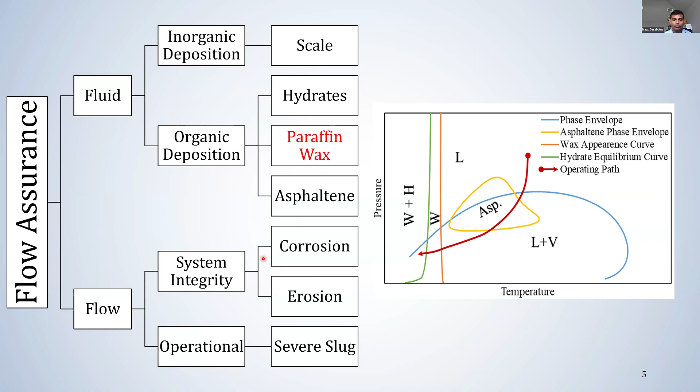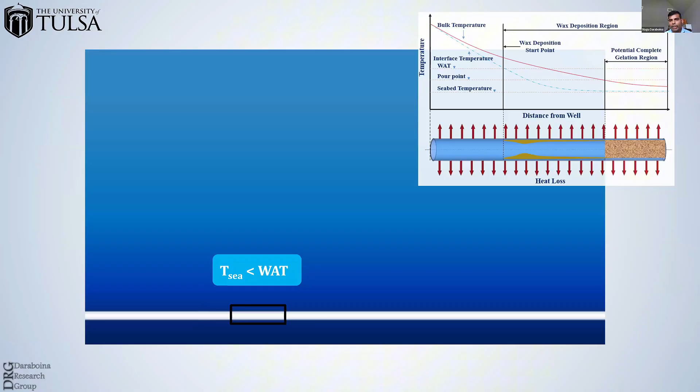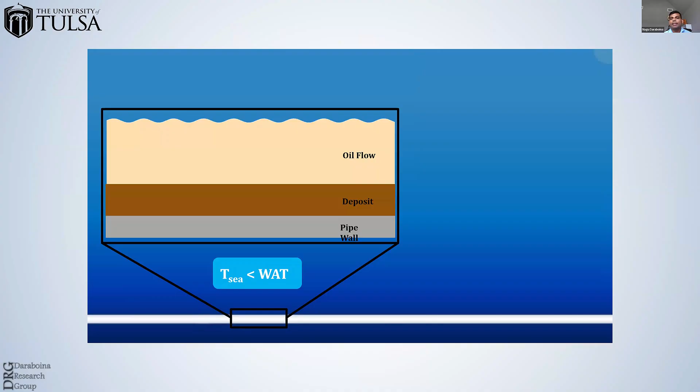But today, particularly, I want to focus on wax deposition. In subsea conditions, the hydrocarbons are exposed to a very cold environment. As the produced fluid reaches and goes below the wax appearance temperature, what we call WAT, the wax will start to precipitate out and deposit on the pipe walls over time. This deposition can inhibit, even completely restrict, the flow, resulting in decreased production, increased costs, and even complete facility shutdowns in some cases.

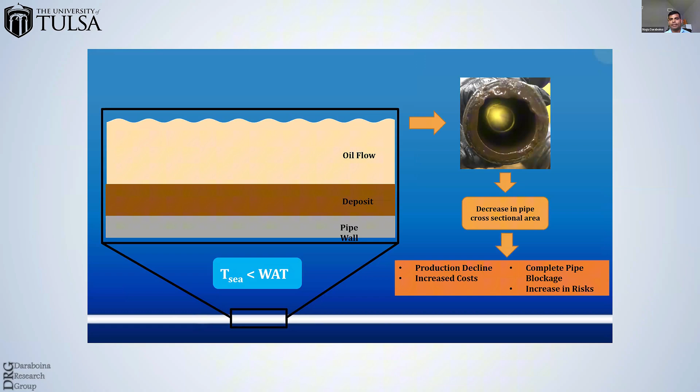So now I would like to explain how the University of Tulsa and the oil and gas industry work together to solve this flow assurance issue of wax deposition. It starts with companies generally evaluating their oil assets, looking at how much oil they have, its quality, and how we can analyze to determine if it's worth investing in a particular project.

Then we begin running small-scale experiments in labs using tools like gas chromatography or a rheometer, small scale, to understand how it behaves under different conditions. This step is what we call benchmarking. If the results look good, we move on to larger experiments using flow loops that better represent actual pipeline systems. From this, we develop detailed models to predict issues like wax buildup and flow blockages. These models are then used in flow assurance software, which helps simulate what would happen in the field.

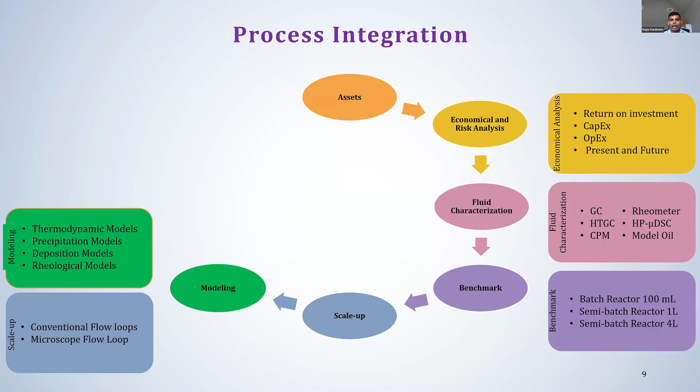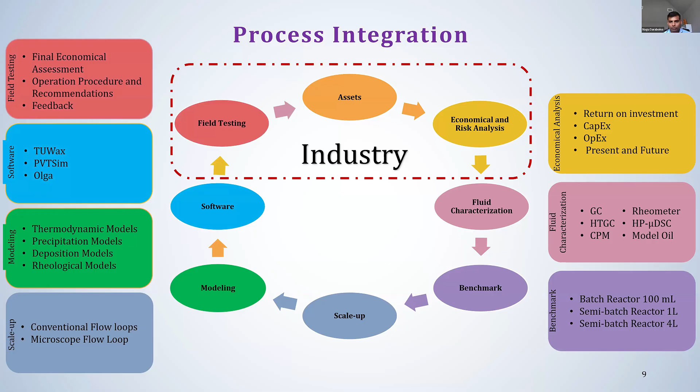After this, industry moves into field testing, where they apply possible solutions to real world conditions and gather feedback. So both sides, industry and TU, exchange and share information constantly.

The industry provides real data and feedback, while we refine their models and improve the tools. One of the key deliverables industry expects from us is a practical simulation tool that can be used directly in the field.

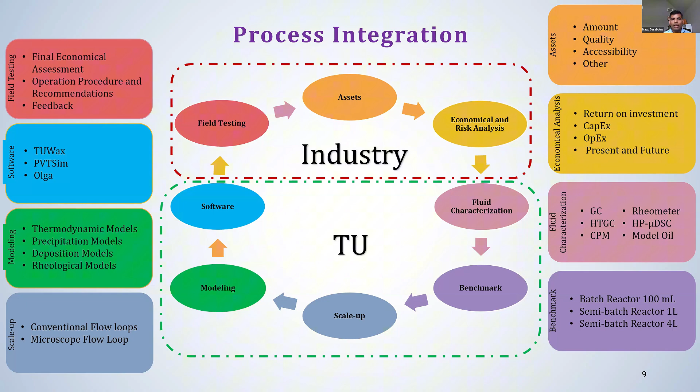These modules interact iteratively to reflect real-time behavior. After updating the conditions at each time step, the loop continues until the final simulation time is reached. This modular and iterative approach allows for flexible, accurate, and scalable modeling of field scale systems.

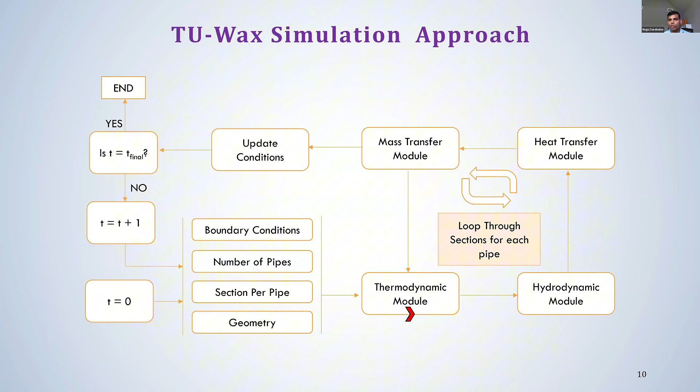Today I would like to explain how the thermodynamic module really plays a role in the wax deposition simulator. To accurately predict wax behavior in the oil and gas production system, it allows us to determine the wax appearance temperature.

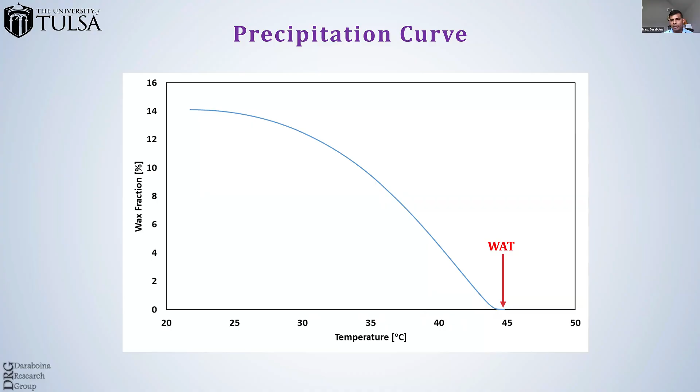Along with the temperature, if you know the pipeline temperature, we can also predict how much wax is coming out, and its composition. So these two are very important thermodynamic properties we want before we even go to the wax deposition modeling.

The most widely accepted wax deposition model since 2000 is the film mass transfer theory. This model assumes all the soluble wax molecules reach the mass transfer boundary layer and start precipitating out, then contribute to the deposit.

Here, thermodynamics provides very important information for the model called boundary conditions, which is where the wax deposition actually starts.

The temperature is supposed to be below WAT, otherwise the wax deposition doesn't start. Once it starts, the precipitation curve is what dictates how much is actually precipitating out and depositing.

However, how do we verify this model's predictions before the field trials? We need experimental data. But wax behavior is highly sensitive to temperature, flow conditions, and composition, so reproducing these conditions in the lab with accuracy and consistency is difficult.

Measurements like wax thickness and deposition rate are also very hard to capture without disturbing the system, and these tests often take a very long time.

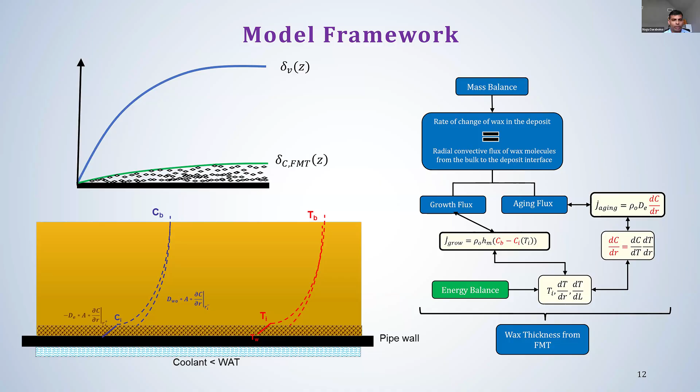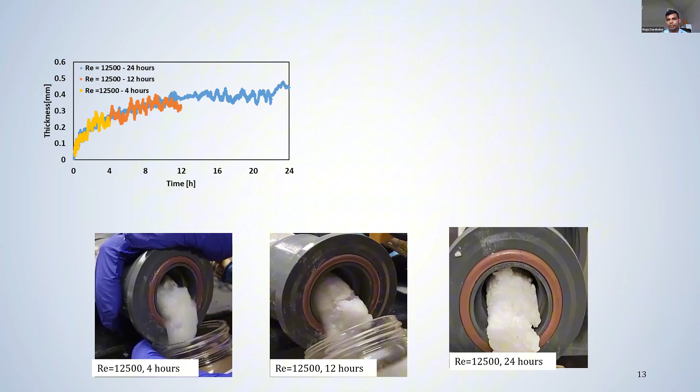As wax accumulates on the pipe wall, the effective internal diameter decreases, causing an increase in pressure drop across the test section. By comparing the measured pressure drop during experiments with the baseline, in this case clean pipe, we can back-calculate wax layer thickness.

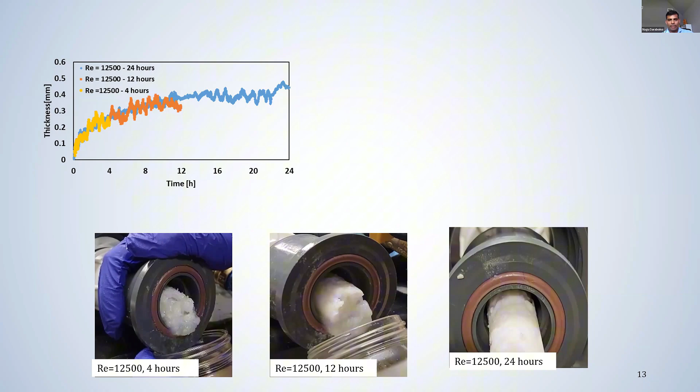This method is non-invasive and very useful for real-time monitoring. We also collect the deposit after each experiment as shown in these videos. Wax content and carbon number distribution are determined using gas chromatography or differential scanning calorimetry.

As you can clearly see in this video, this experiment is conducted at a Reynolds number of 12,500, around 4 hours, 12 hours, and 24 hours of wax deposition timeline. The wax hardness is increasing as time increases.

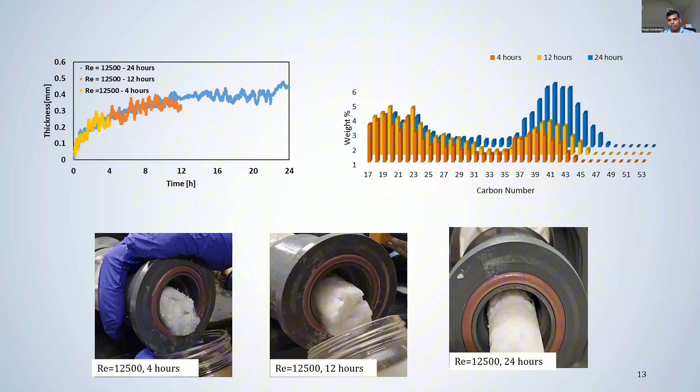We can also clearly observe this in high temperature gas chromatography. From C35 to C45, the carbon number distribution increases drastically from 4 hours to 24 hours.

This is a sample of experiments, but we collect different crude oils, different operating conditions, and different pipe sizes, so we have a comprehensive database.

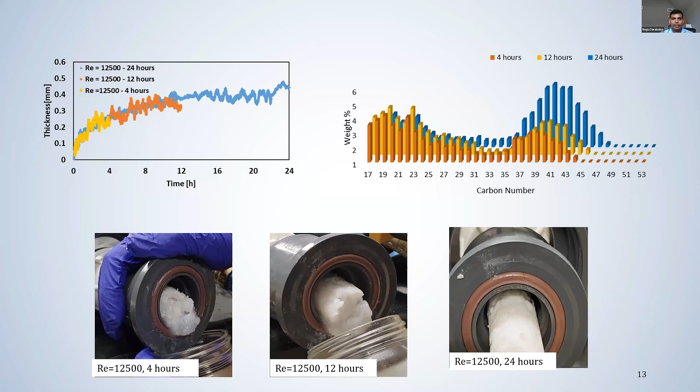This is single phase wax deposition experiments, but we also specialize in collecting wax deposition video of stratified flow and stratified wavy flow, and wax deposition was strongly correlated with flow pattern too.

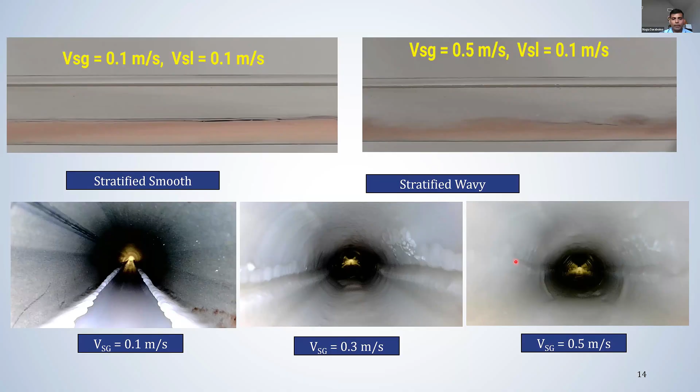Under stratified flow, a deposit formed at the bottom of the pipe, like a crescent shape. However, in stratified wavy flow or in slug flow, it is more or less uniform, and even though there is more wax deposit in the bottom, the wax covers the entire pipeline. This is because in stratified wavy and slug flow, the film thickness will always wet the pipe wall, making it prone to wax deposition.

This is how we collect information with specially designed flow loops. We consolidated several hundred experimental deposition data points using these flow loops under a wide range of operating conditions, fluid types, and durations. We adopted a wax deposition model, and with this extensive experimental data, this comprehensive database was used to validate existing deposition models implemented in our simulator.

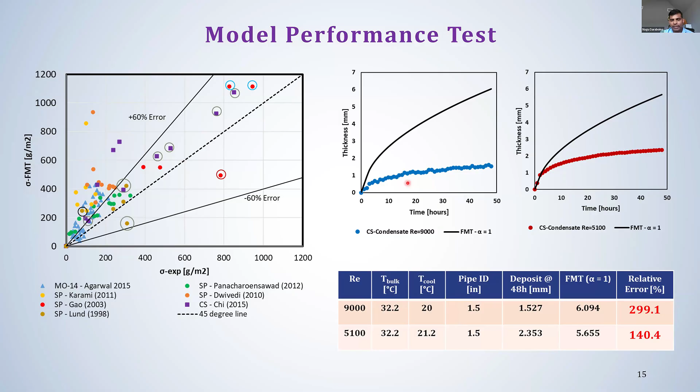As illustrated here, this is a sample result I'm showing. These are two different curves. As you see here, the prediction error is quite high compared to the actual experimental result. In some cases, it's even off by 100%. So basically, the models are over-predicting the experimental result. So why does it over-predict?

Because accurate wax deposition prediction is very important. Otherwise, you are over-predicting the wax deposition in the pipeline and wasting money unnecessarily by injecting chemicals or heating the pipeline, even though there isn't much wax deposition at a particular point. So it's very important to predict wax deposition accurately.

So we went back to the basics, and we saw there are only three ways we can incur errors. Measurement and correlation uncertainty pose significant challenges to model validation. However, their impact can be mitigated by careful sensitivity analysis, high quality data from repetitive measurements, and quantification of uncertainty in measurement. We are doing this very diligently.

But the governing mechanism of wax deposition is not fully understood. It's only assumed, and nobody has proved yet, that all the wax deposition happens from dissolved wax coming to the mass transfer boundary layer and depositing. That is a hypothesis, and the model was developed based on this hypothesis, but there is no verification. So the underlying physics and dominant mechanism of wax deposition, especially under dynamic and multi-phase flow conditions, is still under active research. This gap might contribute significantly to the large errors observed in the model predictions, as I showed you in the previous slides, which can be more than 100 to 300%.

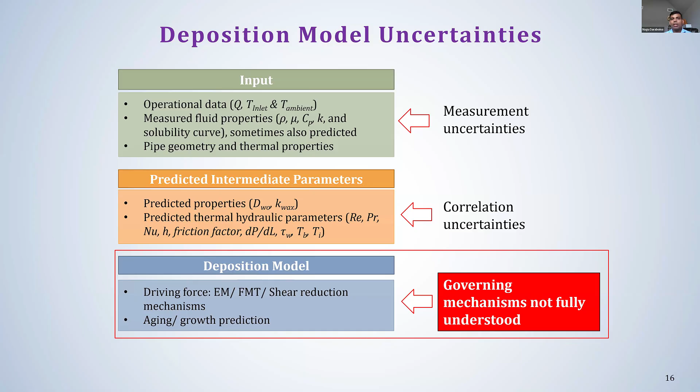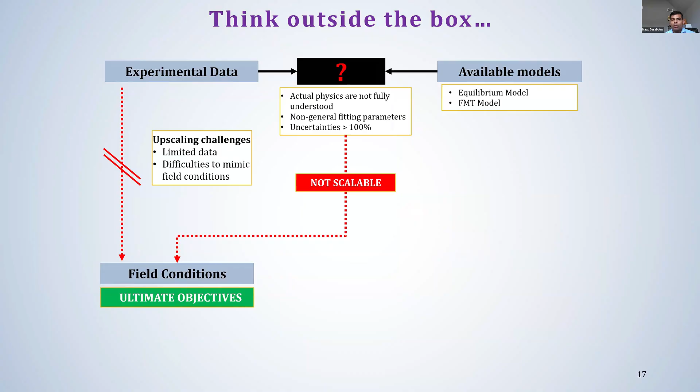So what we observe is that we cannot replicate field case situations in the lab, definitely, because a field case is around 16 to 20 inch pipe, and it's impossible to do those experiments directly in the lab, even with pilot scale flow loops. The flow loops we use are around 3 inch, maybe 6 inch. But also the existing models are not able to predict this phenomena properly.

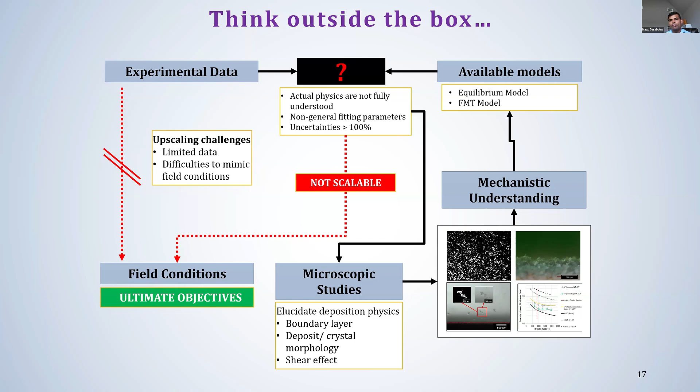So we have to better understand the underlying mechanism of wax deposition. We decided to think outside the box and take a novel experimental approach to observe the mechanism of wax deposition itself, instead of simply doing wax deposition experiments in a closed pipeline. So far the data is collected in a closed pipeline. So we developed a dynamic flow loop system that allows us to directly observe wax formation on the pipe wall under controlled operating conditions.

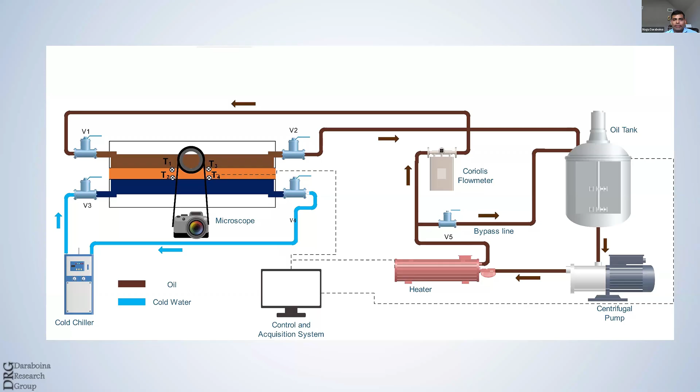Using this dynamic visual flow loop, we conducted several experiments. Through a series of experiments conducted across varying temperatures, flow rates, and wax concentrations, we captured valuable visual data that reveals very interesting insights. One key observation, here I'm showing a sample video of how the wax crystal can be formed on the pipeline wall.

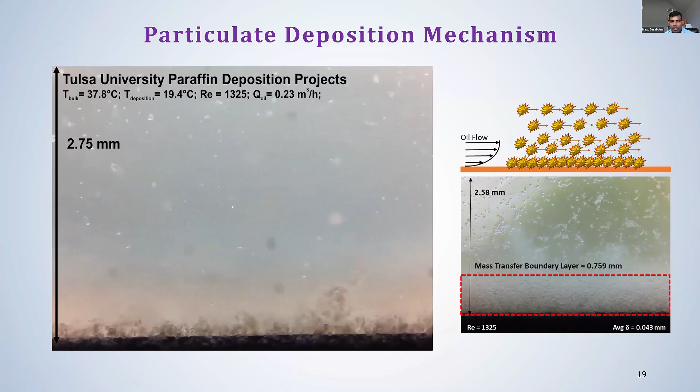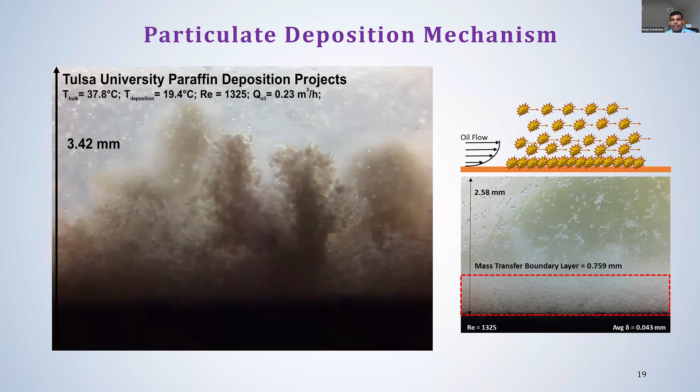One key observation emerged when we compared the visual evidence of wax crystal formation with the calculated mass transfer boundary layer in the existing theory. We consistently saw wax crystals forming above the predicted mass transfer boundary layer. This observation provides a clear explanation for why existing theories tend to over-predict wax deposition rates. The models typically assume that all soluble wax molecules that reach the mass transfer boundary layer precipitate and deposit on the wall. However, our findings show that a significant portion of wax actually precipitates above the mass transfer boundary layer and does not contribute directly to deposition, as you can see clearly.

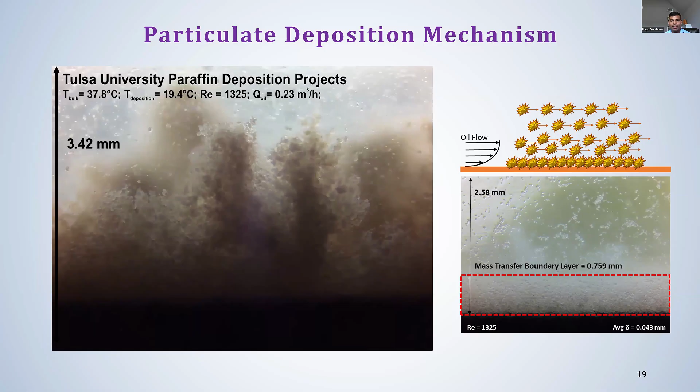So the real challenge becomes: how can we correct this theoretical over-prediction and improve the accuracy of our deposition model?

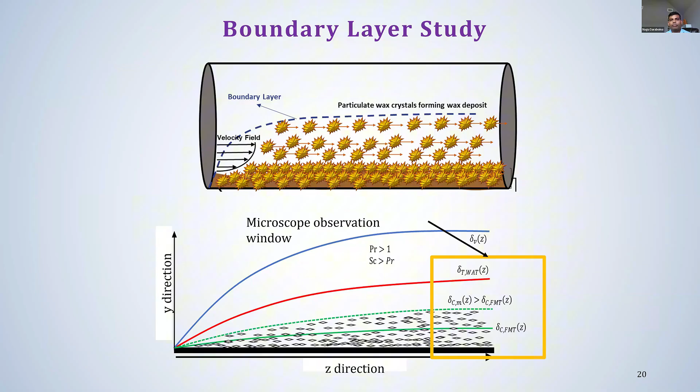The answer lies in information already available to us, called the precipitation curve. If we know the precipitation curve and the radial temperature profile in the pipeline at any point, by analyzing this curve at that profile, we can estimate in real time how much wax is precipitating out above the mass transfer boundary layer.

Incorporating this thermodynamic insight into our simulation model allows us to isolate and subtract the non-depositing portion of the wax from the total, correcting the flaw of the original theory. Instead of developing a new theory, we are understanding and correcting the theory already available.

These results clearly show how a deeper understanding of wax behavior, coupled with smart use of existing thermodynamic data, can dramatically improve the accuracy of wax deposition prediction. We published this model in 2022, a series of publications. The original theory was published in 2000, so it took more than two decades to improve the model, even though all the information was available to us.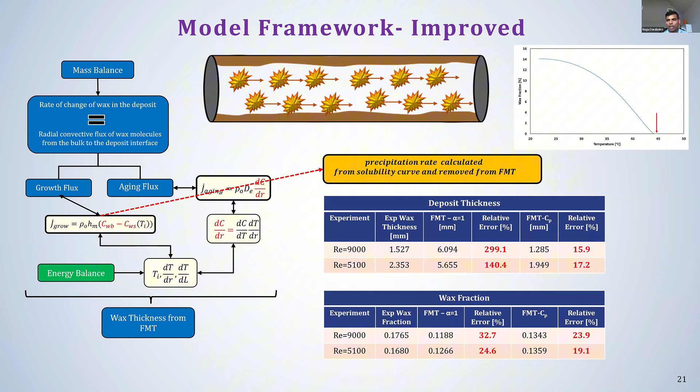I also want to mention some other thermodynamic parameters. Usually in wax deposition, pressure is often neglected in modeling, especially in simplified and early stages. However, pressure can play an important role.

Here you can clearly see the relationship between pressure and WAT in a methane-containing system is non-monotonic. Pressure affects the solubility of wax components by controlling how much light hydrocarbons like methane remain in the fluid. This directly alters the WAT, which is critical for predicting where and when wax begins to precipitate. In offshore ultra-deep water long pipelines, pressures range from 100 to a few hundred bars, so neglecting pressure leads to significant errors in WAT prediction and deposition rate.

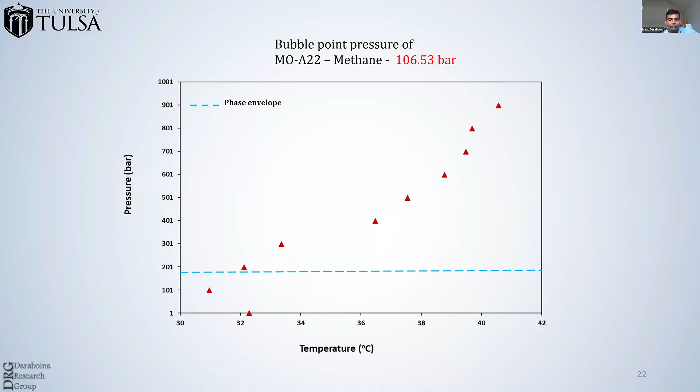These are experiments we conducted in the lab at different pressures. We conducted pressure experiments up to 900 bar using high pressure differential scanning calorimetry, and we observed that the WAT difference is close to 10 degrees with pressure. Knowing this, we conducted some simulations.

As you see here, this is a 25-kilometer pipeline. We tracked the interface temperature, how it changes from almost 45 degrees to the seafloor temperature. As you see here, wax deposition starts at different points along the pipe, even a few thousand meters apart. That's quite a lot, depending on the pressure. So pressure affects both where the wax forms and how much deposits, and at what point.

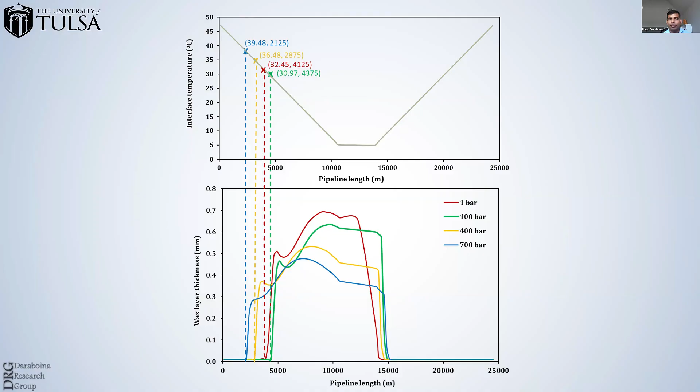It should not be ignored in the modeling, because all the mitigation strategies, like injecting chemicals or increasing the temperature, should know this position very well. A few thousand meters of heating pipeline costs a lot of money. So this kind of data is very useful, and simple thermodynamic data on how pressure affects the WAT can give better understanding of this phenomenon.

Also, interestingly, one more important factor we observed: we conducted experiments with different pressures and collected the deposit sample itself, and then analyzed that deposit sample. WAT is wax appearance temperature, WDT is wax disappearance temperature.

As you see here, with pressure, the temperature required to completely dissolve the wax is decreasing. That means at higher pressures, if you have a deposit formed, you don't need to increase the temperature of the pipeline too high to dissolve that wax. This is likely because it forms a softer deposit at high pressure.

So this information is very useful. Otherwise, you're not going to increase the targeted temperature properly, and you still have some residual wax. As you see here, a small understanding about thermodynamic data can increase actual pipeline wax prediction quite well.

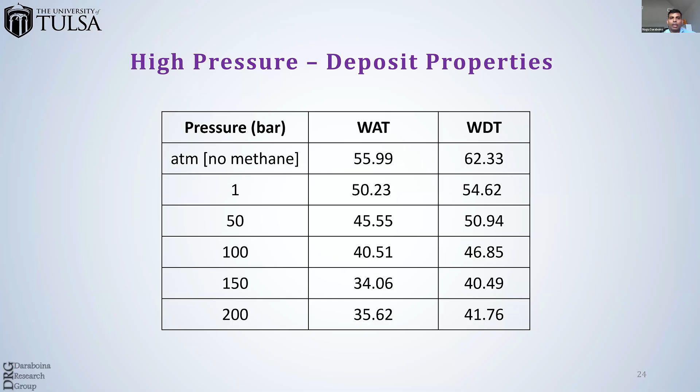So, summary of the first topic: thermodynamics tracks how pressure changes alter phase behavior and how it affects wax solubility and likelihood of deposition in the pipeline. Thermodynamic data and models aid in designing proper mitigating strategies. Estimating how much wax is forming above the mass transfer boundary layer from the precipitation curve increases our prediction capabilities quite highly. All these things we achieved through our integrated approach with industry partners.

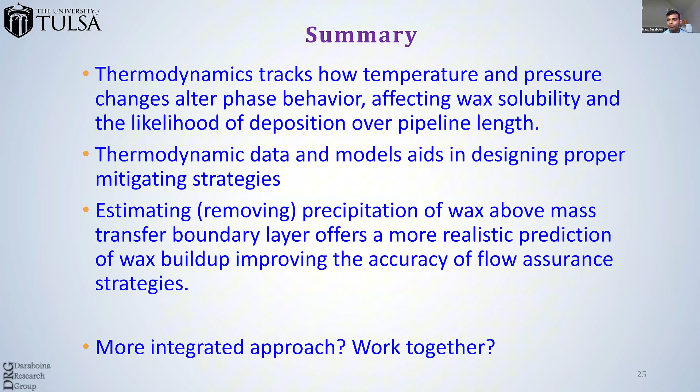I always say a more integrated approach is needed for flow assurance solutions rather than keeping it closed. We should work together to get innovative solutions. With this, I will conclude the first topic, and I think we are good with time.

So let's shift gears to produced water management. This project we got from the Department of Energy two years ago. There is a reason why we went in this direction, which I will explain. In this topic, I will explain how we are using thermodynamics as part of the process development.

What is produced water? Produced water, also known as formation water, is naturally occurring water brought to the surface during oil and gas extraction. It's becoming the largest waste stream associated with oil and gas production.

The United States produces a massive amount of produced water annually, with estimates ranging from 20 to 25 billion barrels. This sheer volume and complex composition of produced water pose a significant challenge for its management.

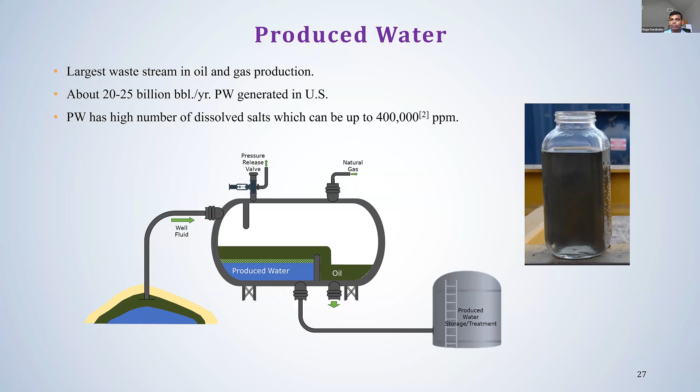As you see here, produced water is a heterogeneous mixture that includes hydrocarbons, heavy metals, suspended solids, and chemicals used during drilling and production. It also often has high salinity. Total dissolved solids are approximately 100,000 to 400,000 ppm, which is very high compared to seawater, and it can be toxic. In some sites, it can be radioactive, depending on the reservoir.

The composition varies widely by location and over time in the same well, making proper treatment and disposal more challenging due to this ever-changing composition.

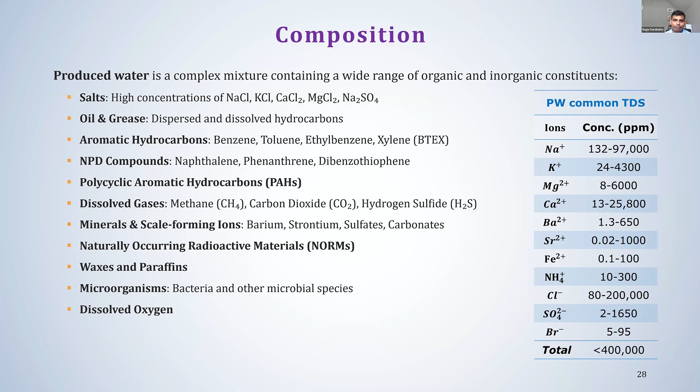Tulsa University is in Oklahoma State, and Oklahoma is a significant producer of produced water, ranking almost among the top 5 states for this byproduct in the United States.

So Oklahoma has implemented regulations and explores innovative solutions for recycling and treating produced water for various uses. The goal is to move towards a more sustainable approach to produced water management, including treating and reusing this water as a valuable resource, while minimizing the environmental impact.

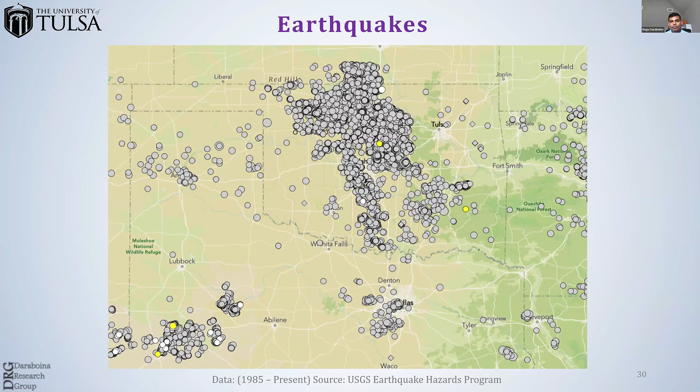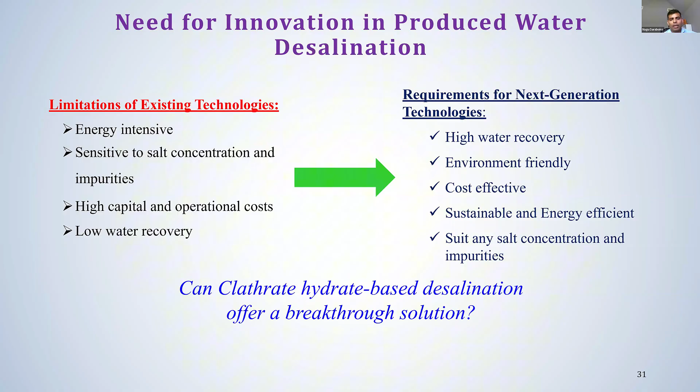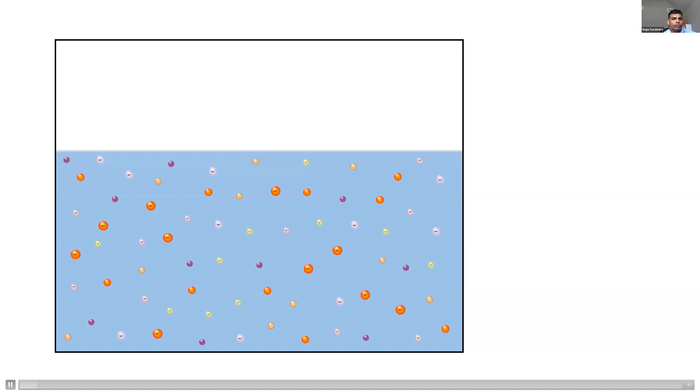So what is clathrate hydrate desalination? Hydrate desalination leverages gas hydrate formation to separate pure water from saline sources. When gas hydrates form, they trap water molecules in a crystalline structure, excluding the salts and impurities. After separation and dissociating, we can obtain fresh water. This technique offers a promising alternative for energy efficient and selective desalination, especially for produced water.

As you see in this animation, when the gas is dissolved, the clathrate structures form, but they don't form with salts. If we separate these structures, we can clearly get clean water.

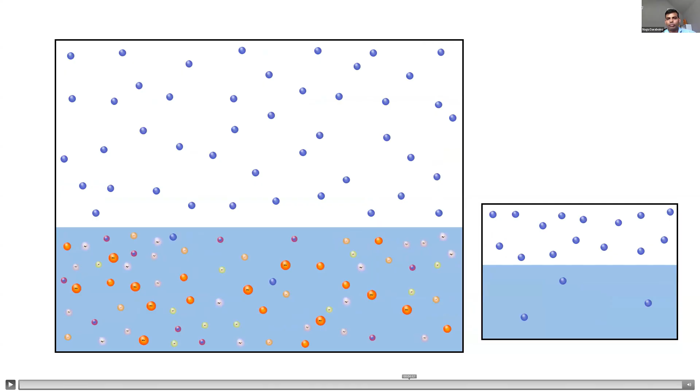So commercializing clathrate hydrate-based desalination demands a structured multi-level evaluation approach. At the outmost layer is a life cycle assessment, LCA, which is essential to assess the environmental impacts of the process from raw material extraction through operation to final disposal. However, conducting a meaningful LCA depends on having accurate data on energy consumption, material input, and process cost, which we call TEA, techno-economic analysis.

TEA evaluates the financial feasibility of the system by estimating the capital expenditure, operating costs, energy demands, and water recovery efficiency. This economic assessment in turn relies on understanding system kinetics - the rate of hydrate formation, the rate of dissociation, which also influence reactor sizing, throughput, and overall system design. This kinetic performance often defines productivity and operation efficiency, but the kinetic models are rooted in a solid grasp of thermodynamics.

Thermodynamics determines the fundamental limits of hydrate formation, identifying the pressure and temperature conditions under which hydrates are stable or not. At the heart of the entire framework is thermodynamics. So, in a nutshell, if you want to perform LCA, you need TEA. If you want to perform TEA, you need kinetic information data. But if you want to have good kinetic data, you need thermodynamic data. So thermodynamics is the core of the entire commercialization process in this scenario.

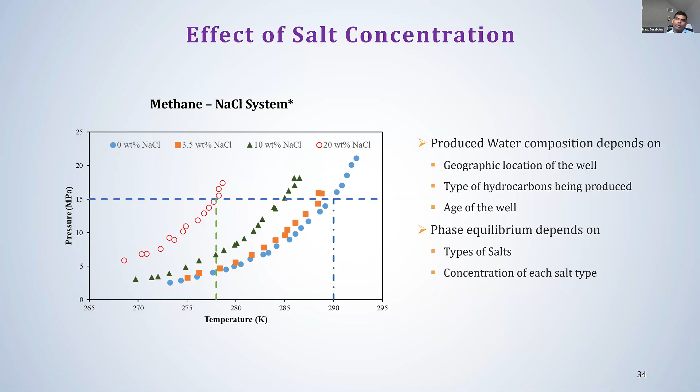So we conducted lots of experiments with different salts. A comprehensive database, close to 500 data points for hydrate formation, was created for single and binary and several different produced water compositions for various promoters. This database promoter is nothing but the gas component or liquid component we use to form the hydrate.

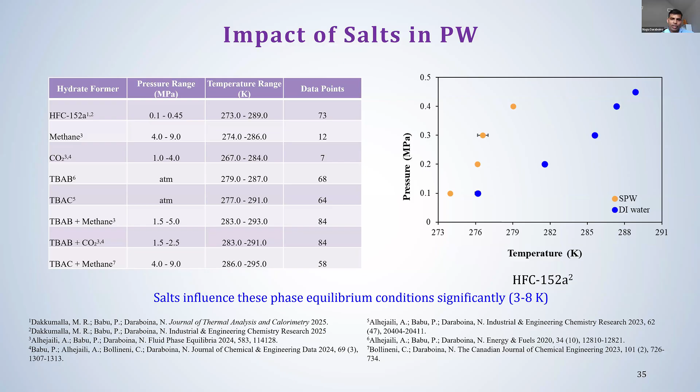This is in preparation to implement hydrate-based desalination. However, just having data itself is not good, because produced water composition is continuously changing with geographical location. Even within the same location, it's continuously changing with production time and age of the well. So it's important to have a real-time prediction tool based on water composition and type of hydrate former.

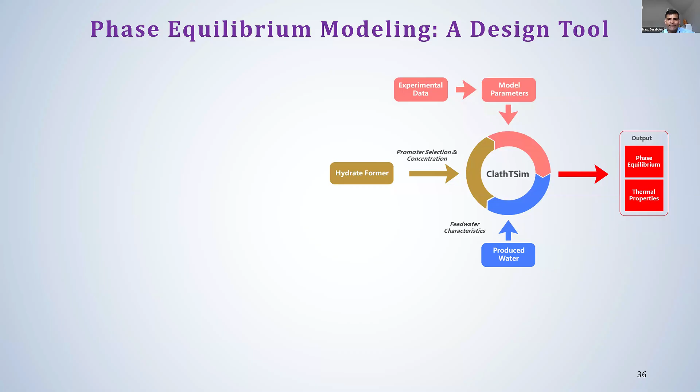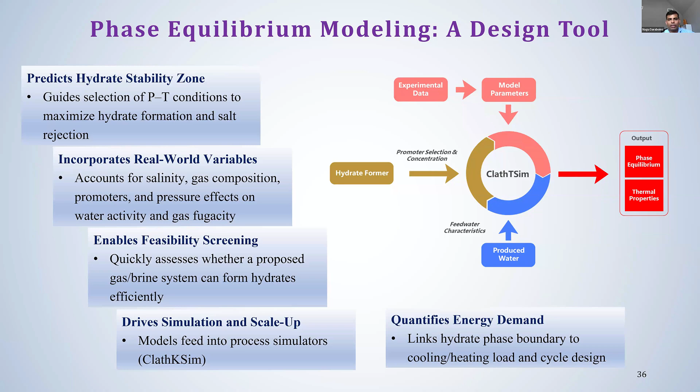This is a simulator we are developing. This is not just a simulator about hydrate formation. It provides comprehensive predictions. I'm not going to go into too much detail about how we are modeling it, but I'll give you a little bit on how the simulator works.

The presence of salts in water affects the thermodynamic conditions of hydrate formation by altering the basic activity of the liquid phase. Dissolved salt ions form hydration shells, binding the water molecules and thereby reducing the amount of free water available for hydrate formation. This reduces the free water, leading to a decrease in water activity, depending on the charge size and hydration strength of different salts. So thermodynamically, this makes it more difficult to form hydrates in saline brines than in pure water.

To capture these effects in modeling, activity coefficient models were used, like the Debye-Huckel equation along with a modified Davies equation, or some in-house developed equations, to accurately predict the reduction in water activity due to salt presence.

I also worked with Denmark Technical University for almost 3.5 years as a postdoctoral fellow. That's where I learned all about physical modeling.

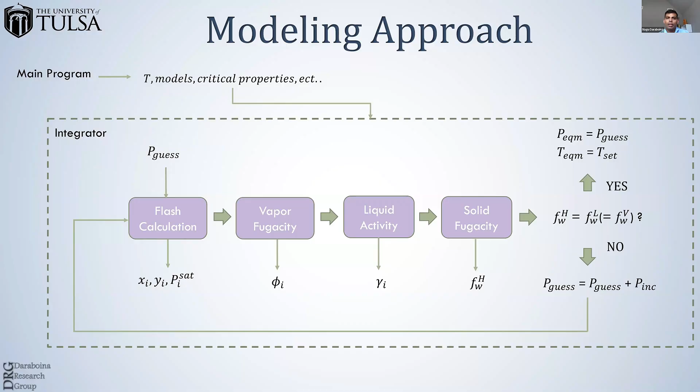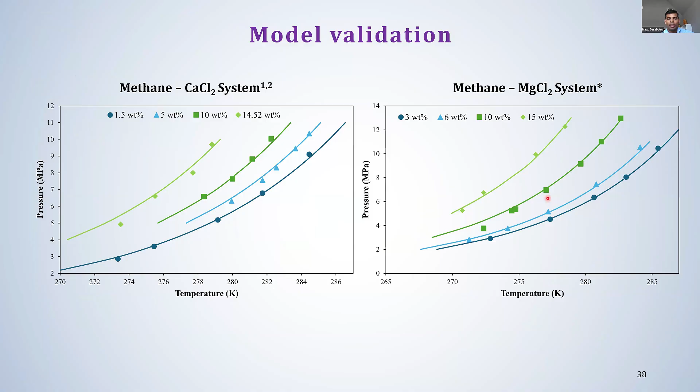So we are in the process of developing this simulator with binary salts and then synthetic produced water composition data we have. Eventually, our goal is that using this ClathTSim process, if you have a produced water composition and the type of hydrate former, we should be able to predict this envelope. This envelope dictates our operating conditions for kinetic experiments. So ClathTSim defines the thermodynamic conditions under which hydrates will form. Essentially, it tells us whether formation is possible.

However, thermodynamic stability alone is not sufficient for practical applications. It's necessary, but not sufficient. So to implement effectively, we also need to understand how fast the hydrate forms, how much water is converted, and how much salt is rejected in the process.

That's where ClathKSim comes into the picture. It's our kinetic simulator, designed to predict hydrate formation rates and evaluate system performance under different reactor configurations and operating kinetic data.

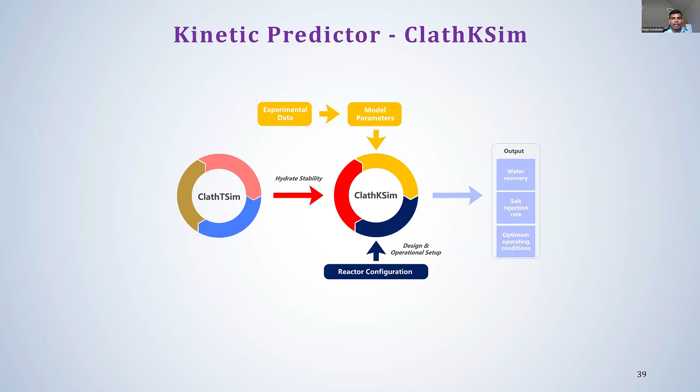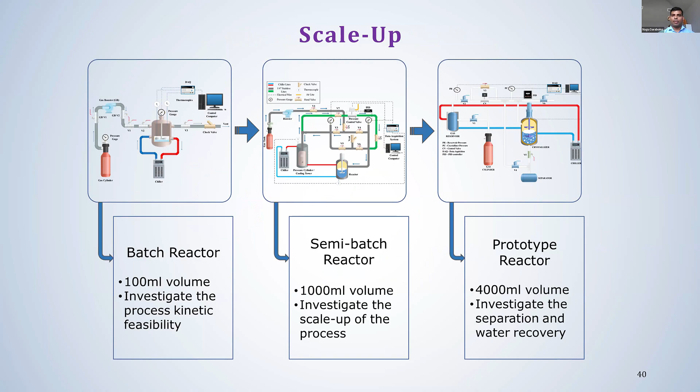Here is an example of kinetic data. I'm showing a gas uptake curve during hydrate formation in one of our reactors, where we monitor hydrate formation by tracking the pressure. From this, we can estimate the water recovery.

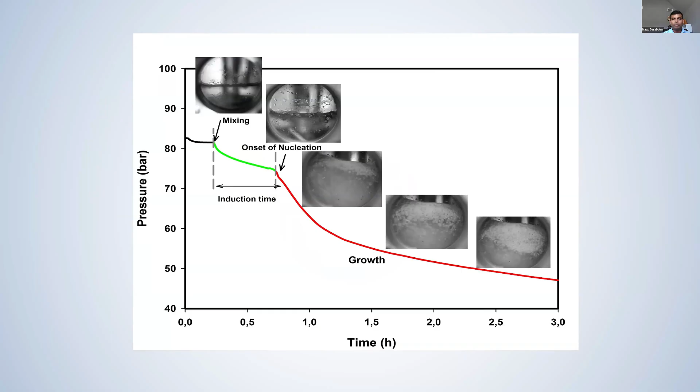So this is the water recovery data. Water recovery is a measure of fresh water extracted from saline water in the hydrate-based desalination process, after hydrate decomposition. Water recovery percentage is calculated from the equation here, where FH is the fraction of recoverable hydrates after separation. Separation is a crucial step in the hydrate desalination process.

This figure represents a comparison of water recovery percentage for different hydrate formers at different salt concentrations. We are also collecting kinetic database data to simulate the ClathKSim. Hydrate formers having a higher water recovery percentage are preferred in this case.

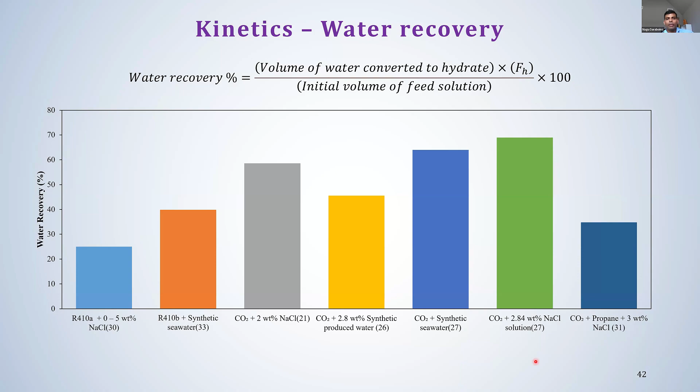Similarly, we can also measure salt concentration before and after hydrate formation, which will provide the salt rejection rate. The salt rejection rate is a measure of salt removal efficiency of the desalination technology we are using. This figure shows the salt rejection percentage of different hydrate formers at different salinities. Obviously, we want a hydrate former with a high salt rejection percentage.

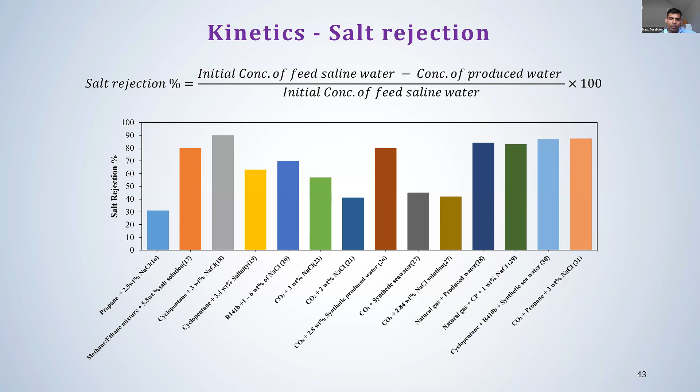So the ClathKSim provides insights into the dynamic behavior of the system: how quickly hydrate forms, how much water is recovered, and how effectively salts are rejected under specific operating conditions. However, even with optimized kinetics, a process must also be economically viable to move forward to real-world deployment.

So to evaluate this, we transition into techno-economic analysis. Basically, in techno-economic analysis, we want to capture the capital and operating costs and specific energy consumption of this particular desalination process. This step bridges the technical performance with economic feasibility.

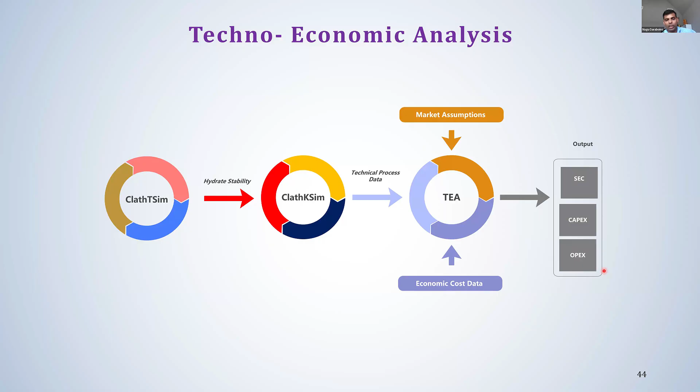A clathrate hydrate-based desalination process was simulated using Aspen HYSYS. The actual hydrate database, however, we created our own data. We have thermodynamic data and kinetic data available from our laboratory. So we created the hydrate components as special components in Aspen HYSYS and did some simulations.

Here, the main focus will be on major energy components like the feed water pump, hydrate former compressor, coolant pump, and dissociation of produced water, and the propane compressor, which we use for external refrigeration and heat removal due to hydrate formation. The main important parameter here is specific energy consumption, and how we can achieve a lower specific energy consumption. Specific energy consumption is simply the total energy consumption per cubic meter of water we produce.

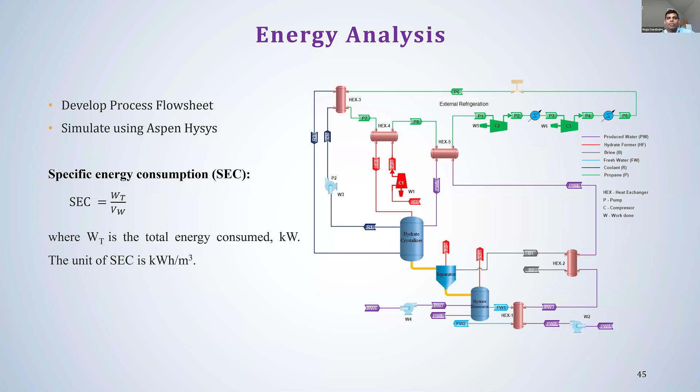So if the key bottleneck is to increase the temperature and pressure of the methane for the hydrate formation conditions, that affects the cost. Then we have to change the promoter to one where we don't need to compress that much.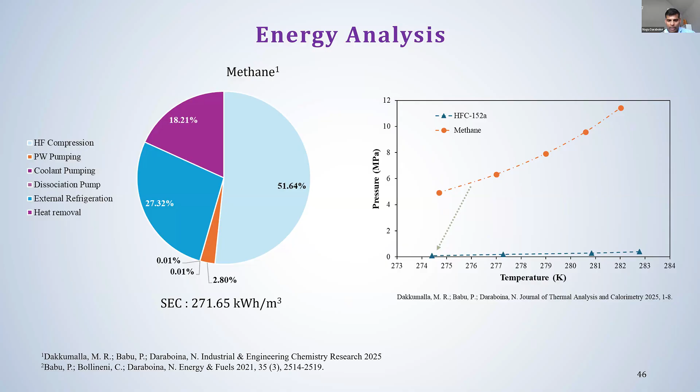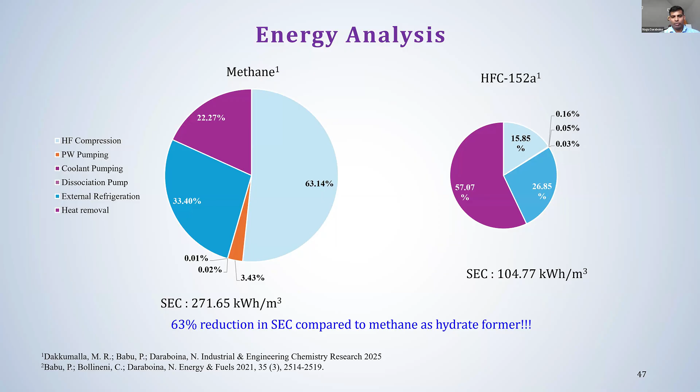We didn't stop here. We're still looking for how to reduce this compression cost. The compression energy requirement for HFC 152A can further be minimized through recycling. So we started putting a recycling loop in the simulation, reducing its contribution to 0.37%. We basically eliminated all the compression cost at this moment.

If you observe carefully, after reducing the compression cost, the major energy consumption is coming from heat removal from hydrate formation, because hydrate formation is an exothermic process. If you keep forming the hydrates, the temperature of the reactor will go up, so we have to constantly chill the reactor and remove the heat. That is a major contribution.

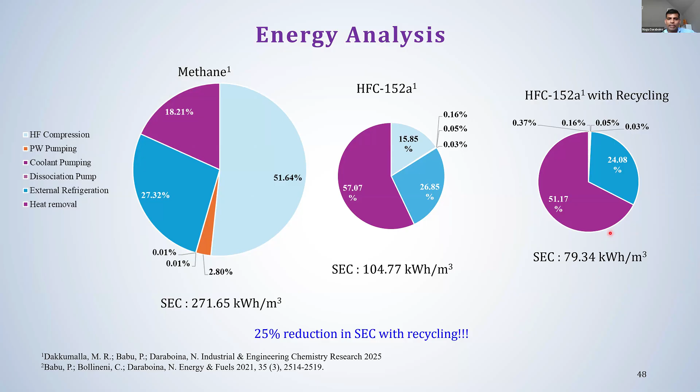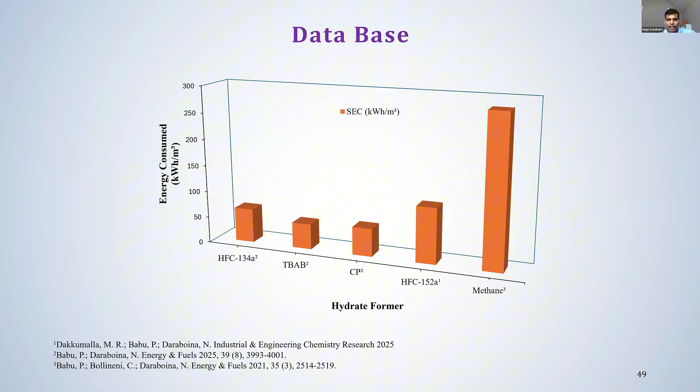So we have created these simulations with various hydrate promoters, and we are creating a database again to identify them. We also found that the majority of the major parameters for hydrate promoter selection are hydration number and enthalpy of formation, because these are very important factors influencing the energy efficiency in hydrate-based desalination.

So there are two parameters: hydration number and enthalpy of hydrate formation. We combined these two and came up with the enthalpy of hydrate formation per mole of water instead of per mole of that component. So we came up with one parameter, and we did theoretical calculations of the specific energy required for heat removal with different promoters. We plotted this enthalpy of formation per mole of water against the SEC, and we came up with a very nice result.

A decrease of just 1 kilojoule per mole in hydrate formation enthalpy can result in almost a 5.5-fold reduction in specific energy consumption. Therefore, selecting the hydrate former with a low enthalpy of formation and a higher hydration number is essential for optimizing process performance. So instead of randomly selecting the promoters and testing them, this kind of consolidated data gives us a picture and a path forward for future selection of promoters.

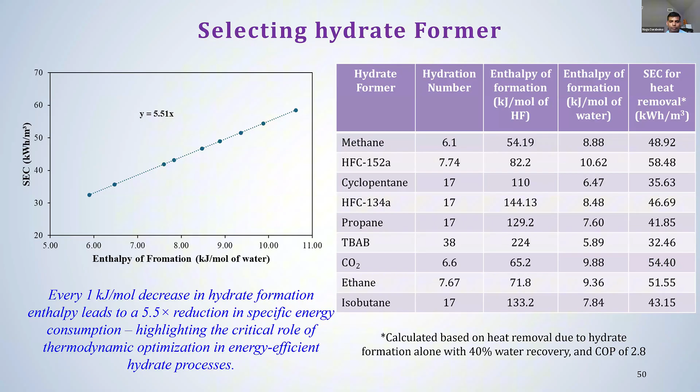So the summary of it is: produced water is not uniform. It is unpredictable, challenging, and growing in volume. Clathrate hydrate based desalination holds transformative aims. To move from possibility to practice, we must simulate, optimize, and assess before we even scale.

Thermodynamics is central to making this process viable for real world deployment, because the selection of hydrate former determines the feasibility and efficiency, and hydrate stability dictates the operating conditions. Predictive phase equilibrium models enable system optimization and process control, basically. And finally, enthalpy of formation directly impacts the energy consumption and economic viability. All of this information comes from thermodynamics.

So advancing hydrate-based desalination from lab to field depends on mastering its thermodynamic foundation. Integrated simulation tools like ClathT and ClathK are critical - they bridge the gap between laboratory insight and real world deployment.